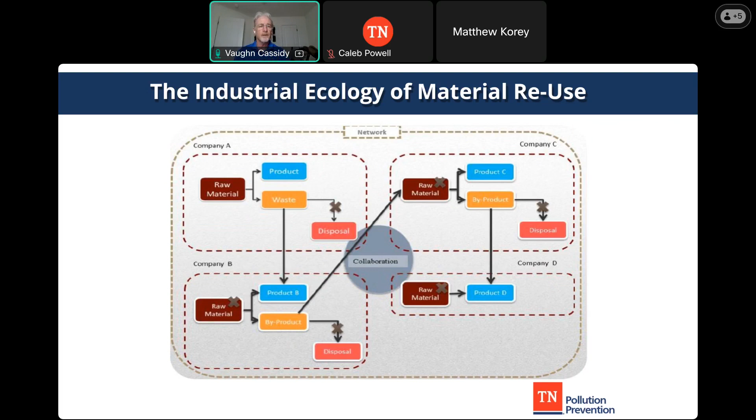There are folks on there that you have certain criteria for. You want to know someone better or get to know somebody a bit better, see them offline, work with them offline. You enter that various criteria that you want, and most of those are pretty successful.

Well, why aren't these successful? This study from the Smeal Business College, and I believe also Pennsylvania State University - they did a big study about this with online waste exchanges, and this was 10 years ago. I looked it up and the metrics are the same. Everyone joins.

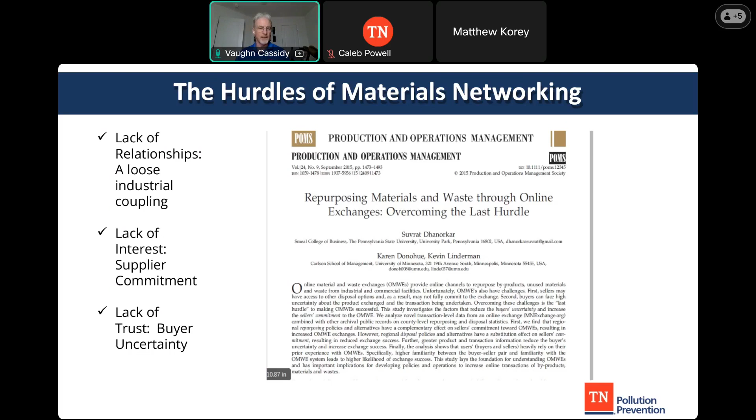So we're all looking for - my office, us, and a few other people in the industry - something we can do together that tackles one material waste problem that almost everyone is having, that we can combine our resources to solve, to be more closed loop and a continual successful waste stream reuse. So some examples here, pretty simple. A few examples quickly.

Dynamic Life Cycle Solutions took cathode ray tube glass - CRT glass that has lead in it from computer monitors - and processed it to where there wasn't any lead. I still don't know how they did that because they won't tell me. But anyway, we did a lot of grab samples and it was free of lead. Florim USA, tile manufacturer in Clarksville - the biggest tile manufacturer on the planet, I believe, right now - took this material in place of regular sand as a visionary attempt to see if they could do this at scale. And it went very, very well. It was 6 million pounds delivered over 3 years.

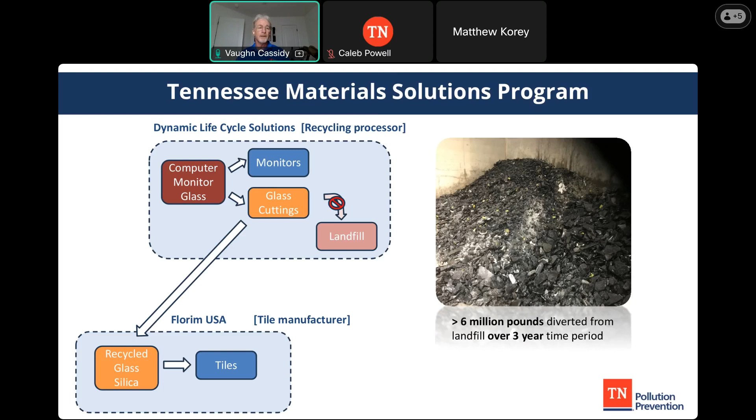Come on, slide change. Here we go. All right, Clayton Homes. Oh, by the way, I'm sorry - Florim USA and Clayton Homes are members and partners in our Green Star partnership. That's how we work with them to this degree. If you would like to know more about that, you can ask us in the chat. There's a lot more to this than just this program, but the Green Star Partnership is a great leadership program in Tennessee for manufacturers. Lots of good folks in that.

So anyway, on to the slide. Clayton Homes makes pre-manufactured homes where they know all the dimensions. It's not cookie cutter - that tends to make you think it's a cheap home. They're not cheap, they're great houses. They're prefab, they're manufactured homes, but they know the dimensions, they know where all the outlets and windows are going to go. So they go ahead and just press out all the gypsum drywall that comes through. So they have a certain amount of waste that they know they're going to have.

And most of it is indeed gypsum. There's some prefab base layer, but that was going to the landfill for a good long while. We tried to use it in some composting operations to assist with the recipe for a good composting mixture, but that was pretty small scale.

Then we found an agriculture industry aggregator, Arrowhead Ag Recycling. They took the gypsum and with very little mechanical manipulation were able to grind it up to be used in a regular material spreader on a farm as a corn supplement application in just a couple of counties. I don't know if many of you are farmers, but 3,000 to 5,000 tons of material diverted to Tennessee farms, even once a month, just really isn't all that much.

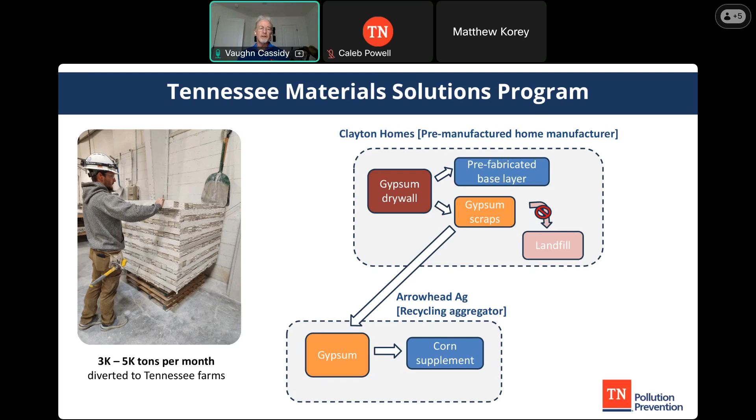All right, so this one, oh boy guys, this was Volkswagen Chattanooga. They were adding an entire new line. This is a major OEM, major vehicle manufacturer that was putting on an entire new line for a brand new vehicle, and the pallets that came in, it was pretty unimaginable.

This was a massive pile of pallets, huge. We again got a processor for recycling, Rockwood Recycling, that actually sited a chipper on site. I don't know if any of you have ever handled many pallets, but this was a chipper that could chew these things up into wood chips and separate the nails and things out. So you had a metal stream and then a wood chipping stream.

But that's an immense amount of energy. That's a lot of carbide blades chewing through all that wood, a massive amount of energy being used to reduce this material down to not going to the landfill, but going to at least one good time use, once and done, as boiler fuel in a pulp and paper mill in Georgia. Georgia's got a lot of pulp paper mills, quite a few more than Tennessee does, and they're close to Chattanooga. That was a good outlet for that.

But if you ever look at a pallet and think about the innovation over the years, and the energy, the human capital, and the material that goes into making just a simple pallet, it's really awful to take those things, many of which can be reused or refurbished, and turn them into wood chips. There are other sources of wood chip material to be boiler fuel, but they didn't landfill them.

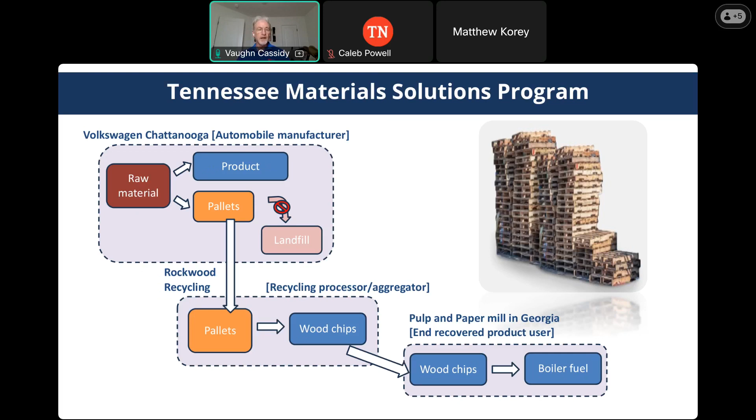It was intended for a very popular, very well-made electric vehicle, as the electrolyte for the battery that makes this car go very fast. It's one of the best ones out there. This material was a specialty material, and it was going to be shipped out - I'm sure some of y'all are already hearing the cash register go ding ding ding ding, all this money.

It was going to be shipped out as hazardous waste. But we were able to get that stuff to a person that, in my opinion, is special - I call him the one who specializes in the misfit toys of the chemical industry. He took that material and was able to do some blending and use it in absorbents and fuel additives. Again, that's better than throwing it away. Better than throwing it away.

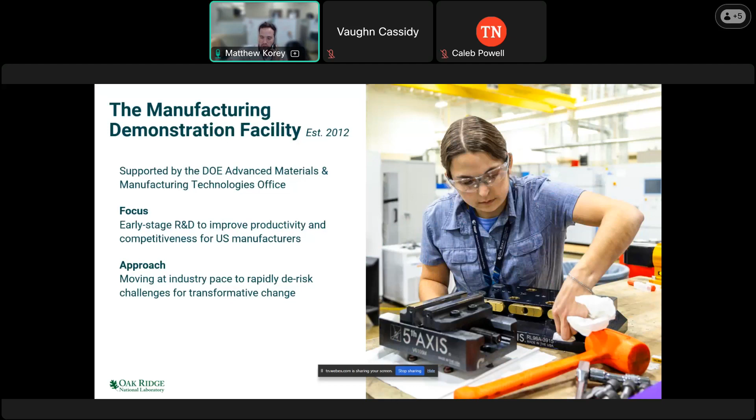I also wanted to highlight that because we are a user facility, we do a lot of industry collaboration. In fact, the MDF is extremely industry forward. I can't think of a single project I'm working on that does not have an industry angle, industry ownership, things along those lines. And the numbers for this facility speak for themselves.

The impacts for the MDF in particular have been exceedingly transformative. Many industries have come and started within this facility. Companies come in, co-locate their staff in our facility, use our resources and expertise, connect with experts, and use that opportunity to catalyze their company growth, especially for startups. There's a tremendous number of licensed technologies and patents coming out of this facility, and I'm really honored and blessed to be working here.

I also wanted to highlight some of the impacts of this facility. There's more than 100 publications per year and hundreds of awards since the facility has been opened. I also wanted to highlight that we're about a 110,000 square foot facility.

We operate more at a pilot, small to pilot scale, but certainly larger than what you would see at a university. For that reason, we do a lot of work with universities scaling up their exploratory technologies for industry, helping enable that disruptive, transformative impact.

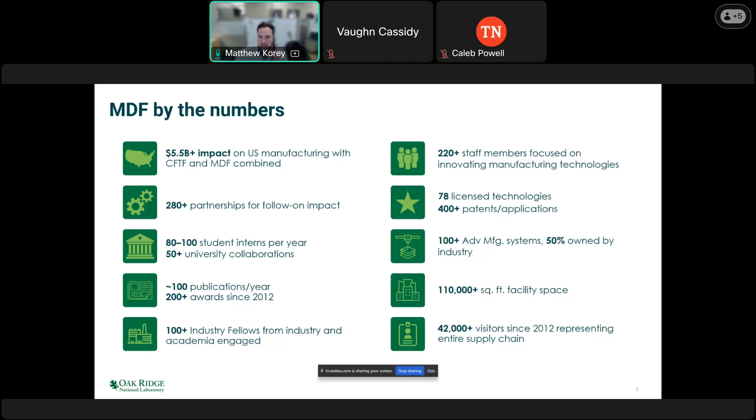There's at least 220 staff that work at the MDF on any given day, almost all of them ORNL or Department of Energy employees. However, we do have co-located industry that works in our facility in addition to that.

My core expertise within our entire facility is primarily looking at how to derive maximum value from what we would consider traditionally waste products from our manufacturing techniques. So our core competencies are primarily in repurposing of end-of-life materials.

On the left here, you're seeing us using a water jet cutter to repurpose a wind turbine blade, which contains a multi-material assembly, isolating a unimaterial stream for further exploration for manufacturing. In this case, we were looking at these materials as repurposable for transmission tower infrastructure.

In the bottom left there, that's actually a lift gate, a trunk for a Volkswagen vehicle. The metal clips and components are contamination for the downstream recycling processes, so here you're just seeing us remove those components using a water jet cutter.

In the middle here, we do a lot of work in composites and plastics recycling. Composites are plastics that contain a filler of some kind, often used in automotive and aerospace applications - very lightweight materials that perform comparably to state-of-the-art metal materials. We do a lot of work recycling these materials and finding applications for them.

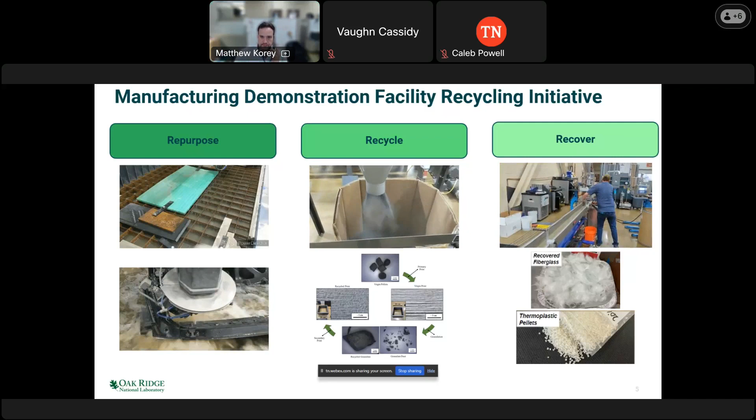I just wanted to highlight to you all today that I am one of many people working in this space. We have existing projects and efforts in several key areas to this industry. I did want to highlight my group leader, Soydan Ozcan, who's the group leader for Sustainable Manufacturing Technologies at the MDF. He's in the top left there. But there's many people working in this space.

We're doing a lot of work because most of the time we don't have the remanufacturing systems, we don't have the technologies yet to really show how we can do this. And so we've developed and built our own equipment as part of this initiative so that we can prove these things are possible. We do a lot of work in next generation recycling technologies, including advanced solvolysis technologies, similar to what incredible work is happening at the Eastman plant in Kingsport.

But we also have existing research looking at biological and enzymatic methodologies for more targeted chemical degradation of plastics at end of life. This allows you more selectivity than you would get from a solvent type process. So rather than having to do separation before recycling, you can actually recycle bulk. We have a lot of work in that space.

We're also looking at more recyclable materials. Materials like polypropylene, polyolefins can be really challenging to degrade using advanced recycling techniques other than pyrolysis. So we're looking at new material systems that are inherently recyclable and easier to recycle.

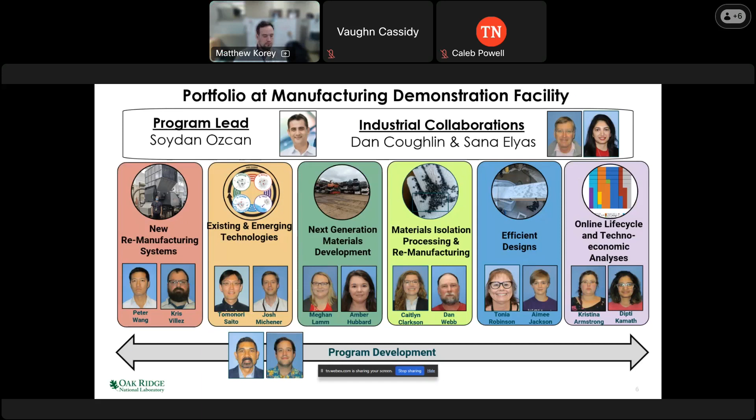I also just wanted to highlight the scale that we're at. So this is me in this middle photo here. I'm 6'4". We have a 4,000 pound per hour throughput stacked Cumberland granulator and shredder system, and you're kind of seeing me standing in front of that.

This system allows us to take large composite materials or non-composite materials - it doesn't really matter the input material - but we process things as large as wind turbine blades through this process. Our current process has a sieve for a 1/4 inch particle on the back end, but that sieve is interchangeable. We can change that sieve out to the particle size required by the industry, and then understand how that affects our throughput, which then affects the actual profit these companies are receiving.

The other thing for people to be aware of is with plastics, and particularly composites, when you're cutting them with a saw, if you aren't aware, there's a lot of challenges with cutting plastics with saws because they tend to melt the plastic and jam up the saw. So we do a lot of pre-processing on our waterjet cutter on the left to help avoid that problem.

And it's been tremendously impactful for us in cutting things as large as wind turbine blades. And then on the right here is our Leistritz twin screw extruder. This is the ZSE 27 MAXX system. And this product allows us to manufacture pellets from shredded thermoplastic composites.

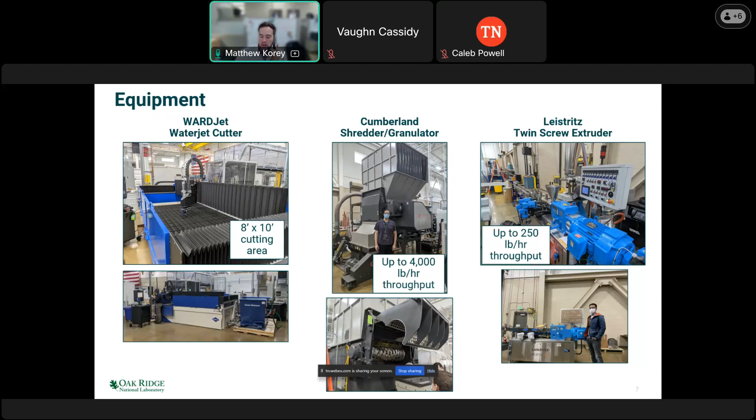We also do a lot of work in new material development for extrusion companies. So we do a lot of work with LyondellBasell as well as Techmer, both of which have facilities for compounding in the state of Tennessee. And we do a lot of work with them to prove out and scale up the processing parameters for new materials. So we do a lot of work in that space, especially with recycled materials. That could be a challenge because they process in a non-uniform way, since the recycled material itself has variable quality throughout.

I just wanted to highlight one example, but we have many, many examples of this. I thought this was a cool story and it was automotive focused, so it was relevant for people here. This is entirely within the state of Tennessee, at least the work was done within the state of Tennessee. This company, AirTech, approached the Oak Ridge team. And on the bottom left here, we have a photo of a production tool. AirTech is traditionally very well known for making multi-layer films for vacuum bagging and other applications.

So AirTech has a new arm of their company, well it's not new anymore, it's several years old, where they do large format additive manufacturing. So this is very large 3D printing essentially. And in order to scale up 3D printing, you can't use a neat polymer, because neat polymers actually shrink after you print them. And when you scale up a print large enough, that shrinkage warps the print and can actually cause collision with the printing head.

So you have to add carbon fiber or other fibers into that composite. When you do so, you drive up the cost of the composite. This tool here on the bottom left was manufactured with a carbon fiber polycarbonate material, which can run as much as $12 to $25 per pound depending on who you buy it from. And that tool itself was tens of thousands of dollars to print.

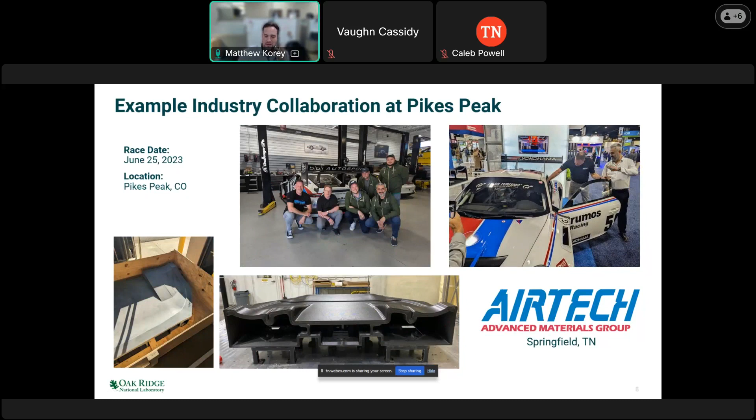So today I really wanted to hone in specifically on the automotive case study. I know that Tennessee is seen as kind of like a southeastern engine for automotive manufacturing. We have several automotive OEMs located in this state, and it's my understanding that more than 140,000 people in Tennessee work for the automotive manufacturing sector. There are many tier suppliers, and so there's just a lot of people working in this space. This is a very important industry for the state of Tennessee.

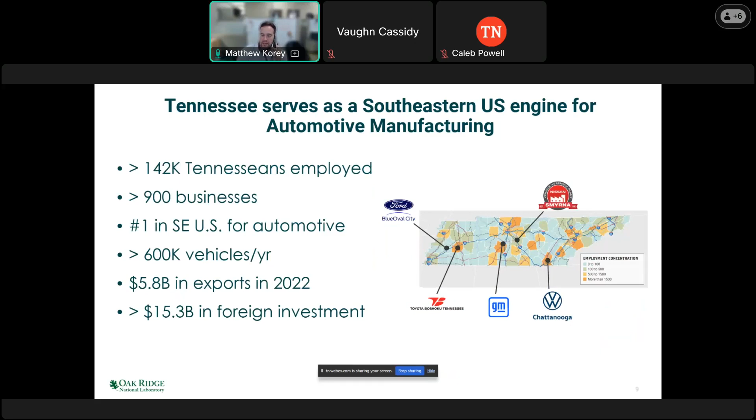I just wanted to highlight here the value proposition for looking at the automotive industry, especially for plastics and composites recycling at end of life. And the reason why is because in the past several decades, the amount of plastics in cars has been increasing, and they've also been found in more and more diverse applications throughout the vehicle as the years have gone on.

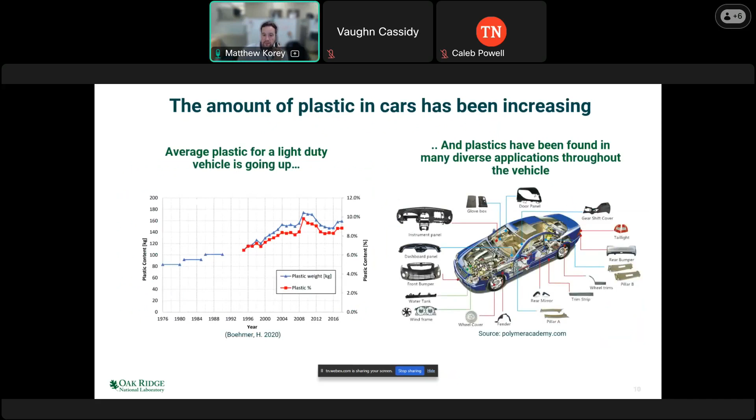The primary reasons we're seeing this are because plastics enable safer vehicle designs, being that plastics can absorb more energy in an impact than a metal can. Also, plastics are more manufacturable, which means they're able to be made into much more complex components that are easier to assemble at the plant.

But we have a few additional challenges as plastics displace metals in vehicles. They've undoubtedly made the vehicles more efficient, in that you get more mileage because the cars are lighter, but this creates additional challenges at the end of life of the car and more opportunities for R&D to overcome those.

So the first major challenge is that there are many different materials, on average hundreds of different grades of plastic in a single vehicle. That makes it really challenging to recover any unimaterial stream in a high enough volume to make it make sense to do the recycling.

Another big challenge with the use of plastics in vehicles is that they're part of very complex multi-material assemblies, from which isolation of any one material alone can be cost prohibitive. Although it is possible to isolate a single connector from within a door panel, one might think that might not be cost effective, right? So that's one thing we need to think about.

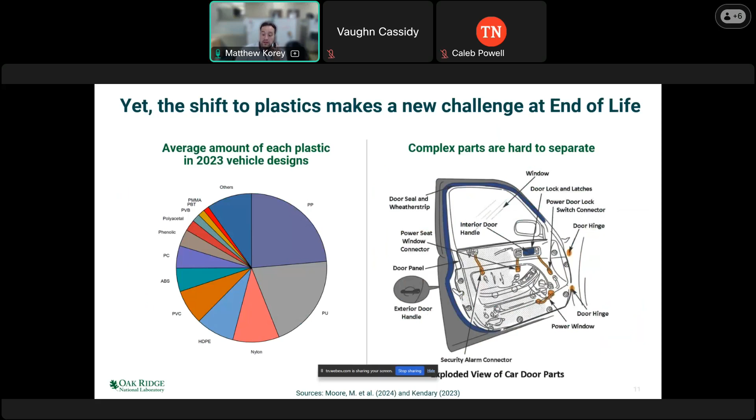But it's important to note that although this is a challenge, almost all automotive OEMs have sustainability commitments they've made, pledges to increase not only recycled content, reduce CO2 emissions, but also increase bio-based content in vehicle designs.

However, the European Union has just recently passed legislation that will require vehicle OEMs to incorporate 15% recycled plastics by 2032. So 15% of every plastic in a car needs to be recycled content. And in addition to that, 20% of that 15% needs to be recycled from end-of-life vehicles specifically.

So right now, we are not recycling plastics from end-of-life vehicles in any meaningful concentration in the US, but if we as US automotive OEMs want to compete in the European Union, then we have to look to ways to do this. And I would argue it's an opportunity for the US to build a competitive advantage on the global market should we be able to get there first. So just wanted to highlight that.

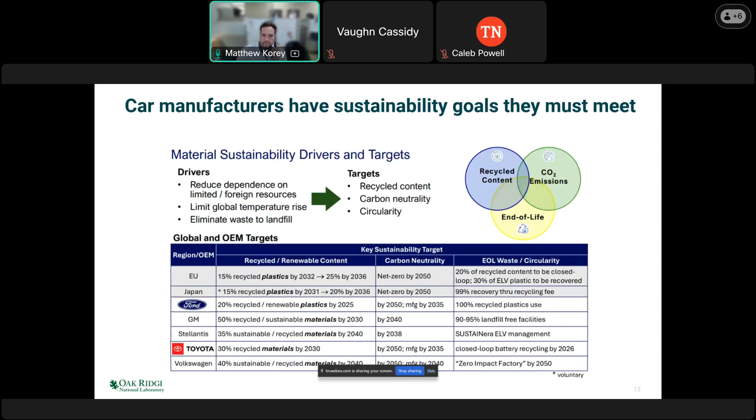So what plastics recycling technologies exist? Well, there are several, but there are a couple that are pretty key to the automotive industry. I want to highlight here that this slide was prepared by my colleague and close collaborator, Dr. Ellen Lee at Ford. I have the privilege of sharing it with all of you because I think it's such a fantastic summary of what exists. So props to Ellen. I'm really thrilled to be able to present this to you.

There are several key recycling technologies, one of which is mechanical recycling, essentially where you recover a plastic at end of life, shred it down, and directly remanufacture the shredded plastic. That is a very low energy process, and it's typically considered one of the cheapest processes. But this process is challenging because it requires a unimaterial stream. You can't really mechanically recycle all plastics as one mix - you have to get them into a form factor where they can be processed at the same material, the same temperatures, etc.

Another process is what's called solvent or chemical recycling. In this process, you basically break down the plastic into small pieces and then put it into a solvent bath, which degrades the plastic down to its monomer constituents. Then you recover those monomers and re-react them back into new plastics.

This particular process is currently cost prohibitive for many different industries, although Eastman has found a process for doing this with PET in the state of Tennessee.

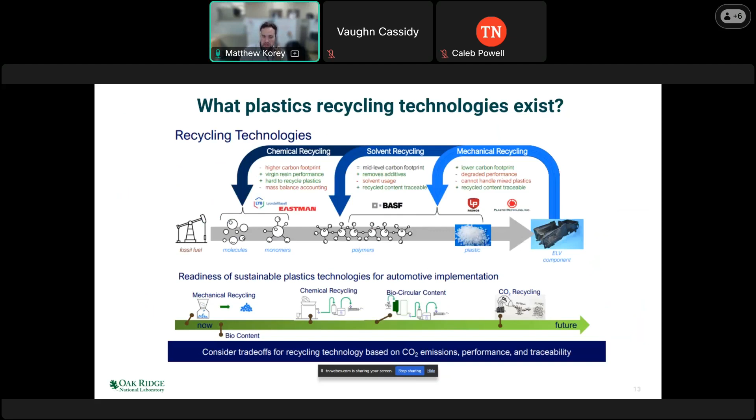As you can see, the farther left we go on this slide, the more complex, the more steps we add to the recycling process. For the automotive industry, the plastics are very low cost, so it's harder and harder to move farther left on this curve because the price of the recycled plastic goes up. So we really are pushing mechanical recycling technologies for this industry.

I know I have about 10 minutes left, so I'm going to try to move quickly through the rest of these slides. But we know what the end-of-life supply chain for a vehicle looks like.

Typically, end-of-life vehicles go to the body shop, and if they're totaled, they're sold at auction, typically to a scrapyard or a shredder. There are also hobbyists that compete in this supply chain. From the scrapyard, parts will be picked off, especially a lot of plastic parts, and directly reused. If you're familiar with LKQ or Pull-A-Part, these facilities are typically what we consider a scrapyard.

But then there's also an industry, the automotive shredding industry, which will take cars and shred them down to recycle the metals from within them. At the shredding facilities, it's very, very challenging to get the plastics out, and I'll talk about why. But the long and short of it is there's a very robust supply chain for these materials at end of life.

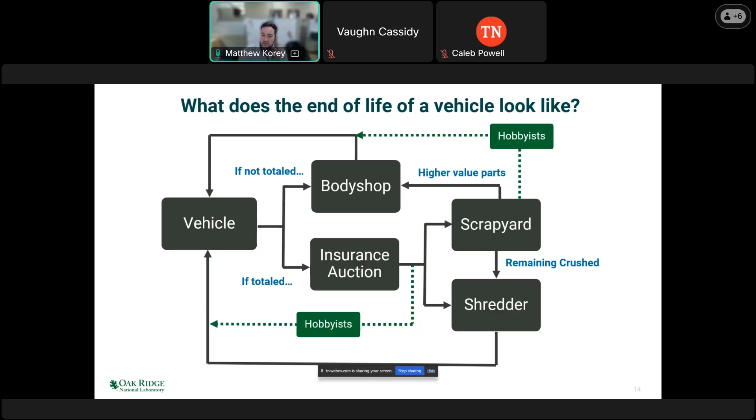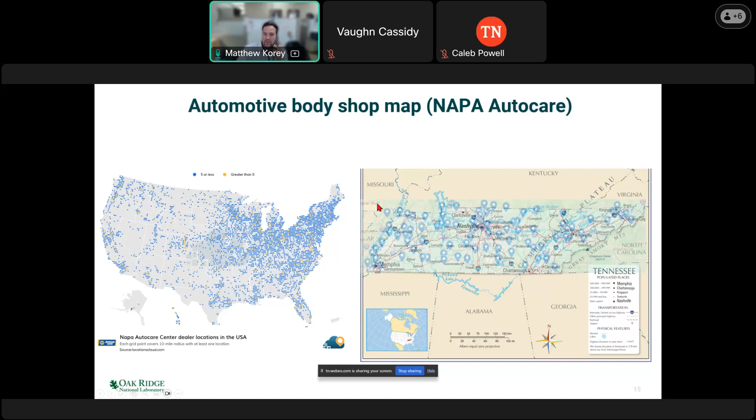I just want to highlight for everybody on this slide, what I'm showing is just the locations of NAPA Autocare, which is an automotive body shop. In the state of Tennessee alone, we have a whole bunch of these throughout the state. For recycling in particular, because the margins are so low, having facilities close by from which we can get materials back can perhaps enable lower costs.

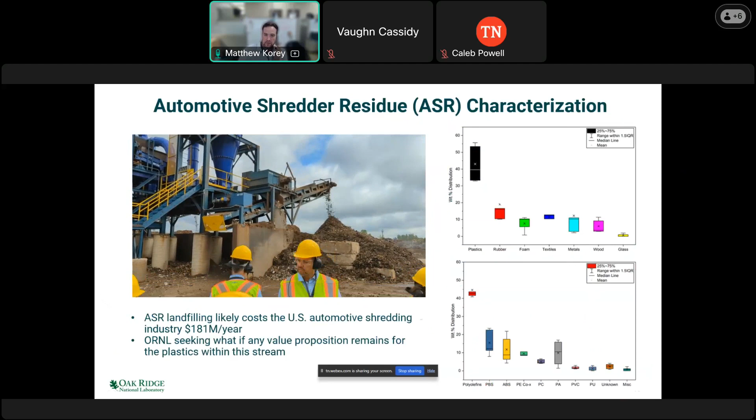I also wanted to highlight that we've done a lot of work recovering plastic parts from the scrapyard. Here, these plastics are not shredded, they are simply dismantled from the car, and for that reason we're able to get a much more uniform material stream.

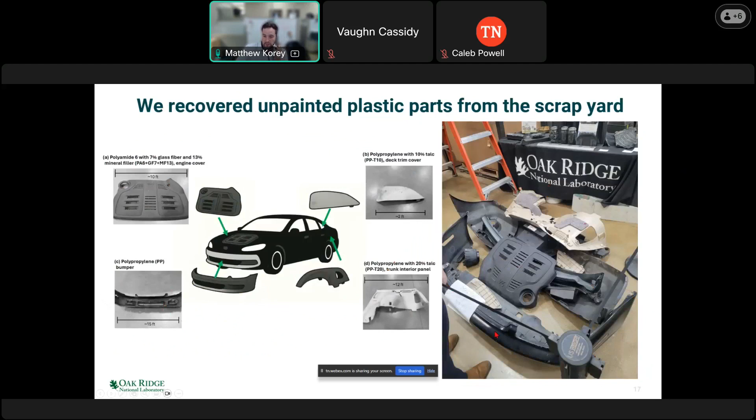I did want to highlight, we've looked at several key industry plastics, including polypropylene, talc polypropylene, and polyamide. These represent low value high volume, and high value low volume plastics in vehicles. What we saw is that these perform comparably to virgin materials. And what we found is most of the discrepancy between today's virgin materials and today's recycled material is that the formulations just got better. So the old materials didn't really degrade, they just are not as good as today's materials because we've engineered them for the last 10 to 15 years. So that was very interesting.

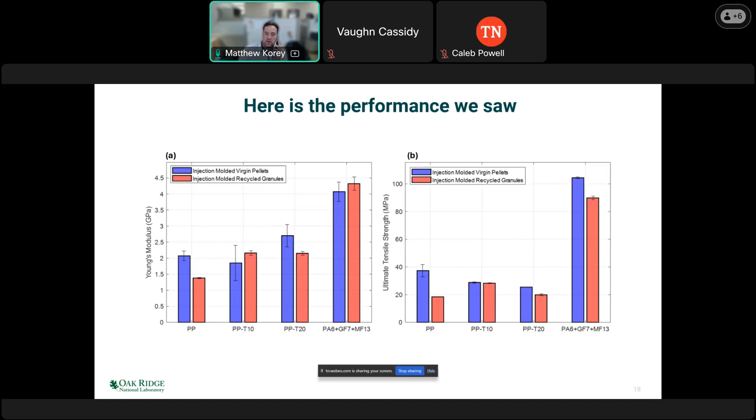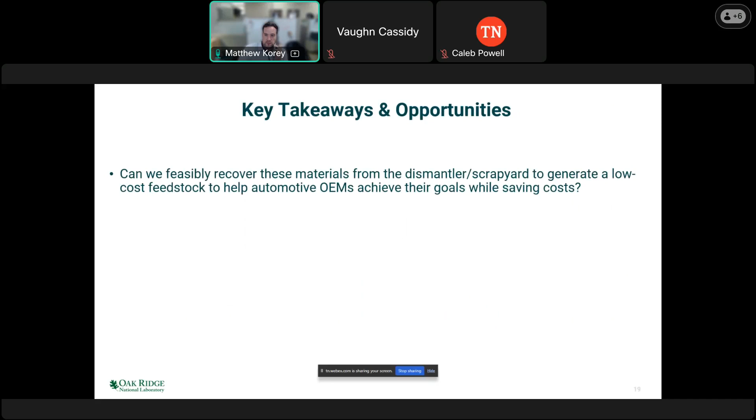So I will stop there for today, but I just wanted to highlight that we think it's possible to recover these materials from end-of-life vehicles, but there are still questions that remain about whether we can make this economical. We don't yet really understand if we were to do this in the state of Tennessee, where the facility would need to be located to ensure economic viability. We also have questions about how we can ensure there's no contamination in the samples. But I just want to highlight that this is an area I think for the state of Tennessee we could be exploring for further R&D.

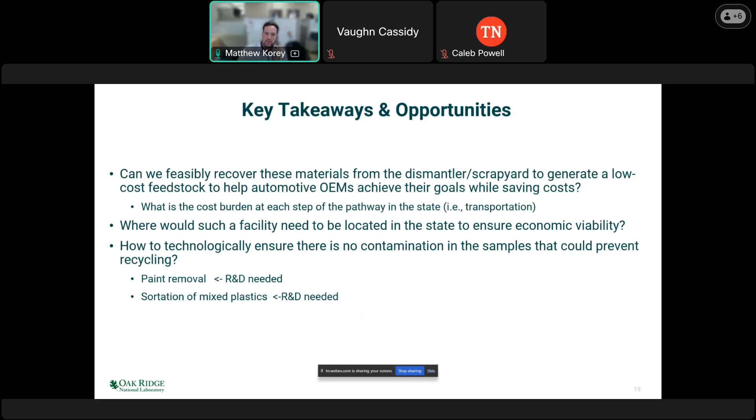Yeah, thanks, Matt. Let's see, I've got one. Well, there's a couple that have came in actually. Let me pull these up. One said, do you guys do site tours at the ORNL MSP? We are nearby and may be interested in seeing things in person.

We do. We have hundreds of tours every year that come through. Please feel free to reach out to me. I'd be more than happy to arrange that for you. And yeah, there's unbelievable capabilities in this facility.

Yeah, and we, I think, actually are in the works of building out an in-person pollution prevention workshop with you guys. So be on the lookout for that. We don't have the exact information right now, but later on in the year, towards the end of the year, late summer, I think we're going to be working through doing an in-person pollution prevention workshop there, where a tour will be a part of that as well. So just be on the lookout, and I'll mention that in our follow-up email for this webinar as well.

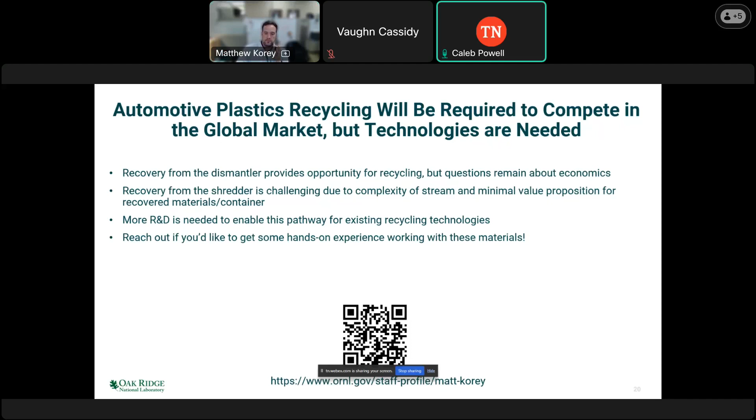I did open up the last final question over on your right hand side for the Slido. Just wanted to ask one last question before we end today: based on the information learned from this webinar, do you see any opportunities to implement changes in your facility, specifically to problem waste or a waste product that potentially could be processed back in or processed into a beneficial material for someone else?